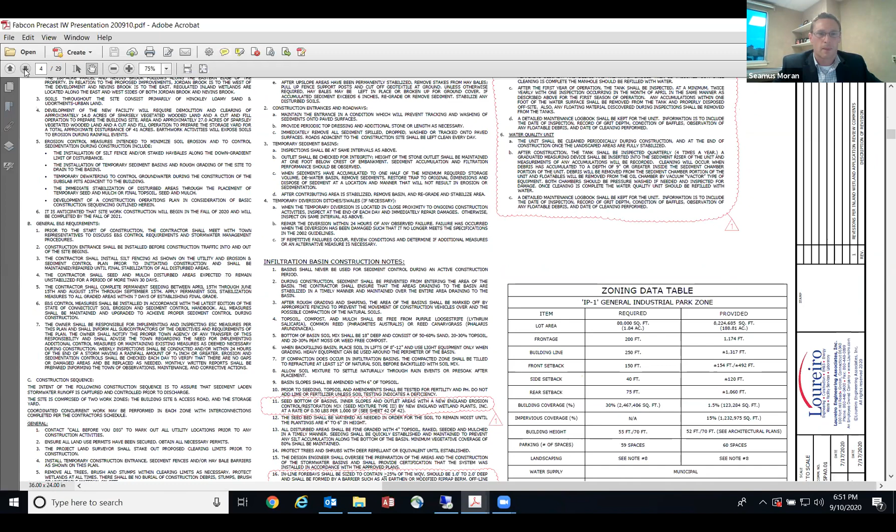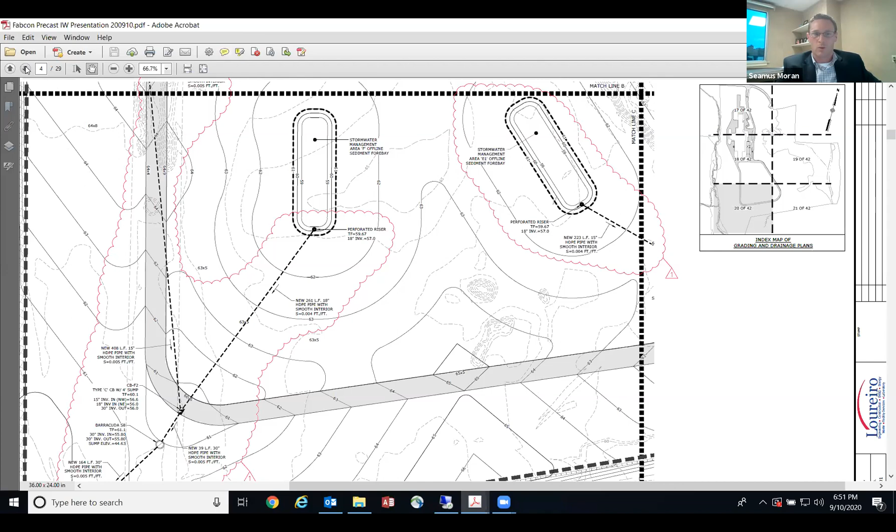Mr. Moran, if I might, excuse me for interrupting - is there any way that as you go through these you can reference the particular item that Maureen has identified? What I can do is, what I ended up doing was provide Maureen's comments with our response at the end of the presentation. If we want to just skip right to that I can, and maybe they overlap at some point. No, I'd just like the commission to be able to identify which of staff's comments have been resolved by the changes you're going to make. Yeah, of course, and I can go over all of that. I certainly want to see your presentation, as I'm sure the entire commission does, but I also want to try to keep tabs on what's been done and what may be left to do.

So how about this - I'll breeze through all the plan revisions we made based on the wetland scientist, and based on the herpetologist. I'll tell you what we did, then we'll get into the comments and go back and search for things. Okay, thank you very much. Of course. So again, oh actually, I was on the right thing.

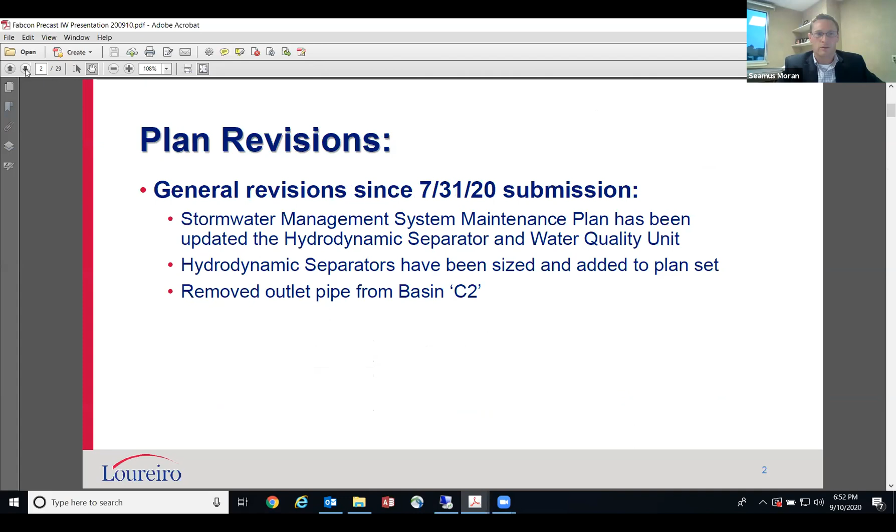Comments from the wetland scientist, Jim Cowen: we revised the plantings in the northeast corner of the storage yard and along basins C2 and C3. We revised the basin seed mixture. We added notes to install milkweed plugs in and around each basin. And we added the approximate location of vernal pool 1 and call-out notes to add woody debris to the slopes of vernal pool 1 to enhance the amphibian habitat.

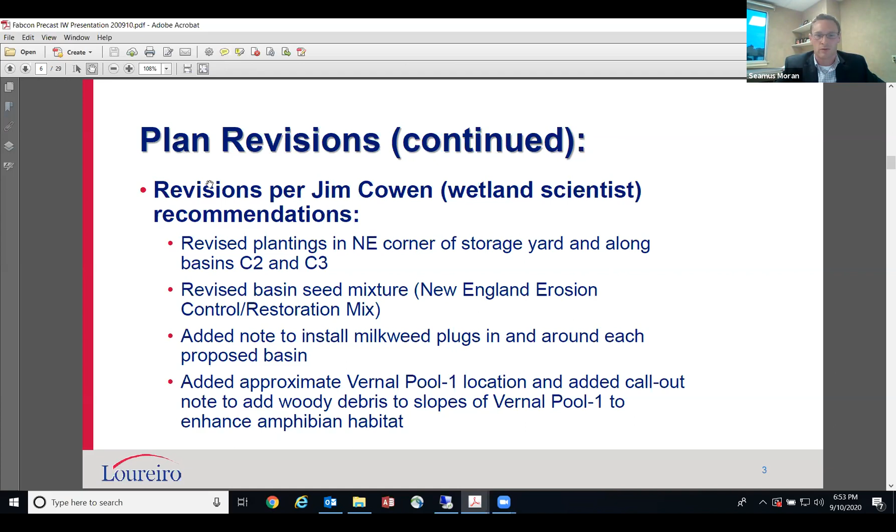For the herpetologist, Dennis Quinn, he asked that we add a wildlife barrier around the perimeter of the site, which we have added. It's a combination chain link fence and concrete barrier - chain link where we don't want to withhold or disturb runoff from getting to where it needs to go, and concrete barriers elsewhere. There was also a conservation easement added around Jordan Brook, 300 feet on the west side and up to 300 feet on the east side - either up to the development or up to 300 feet, whichever is closer. We added that to the plans, and added a note to remove invasive species within the conservation easement. All of those are recommendations by the herpetologist.

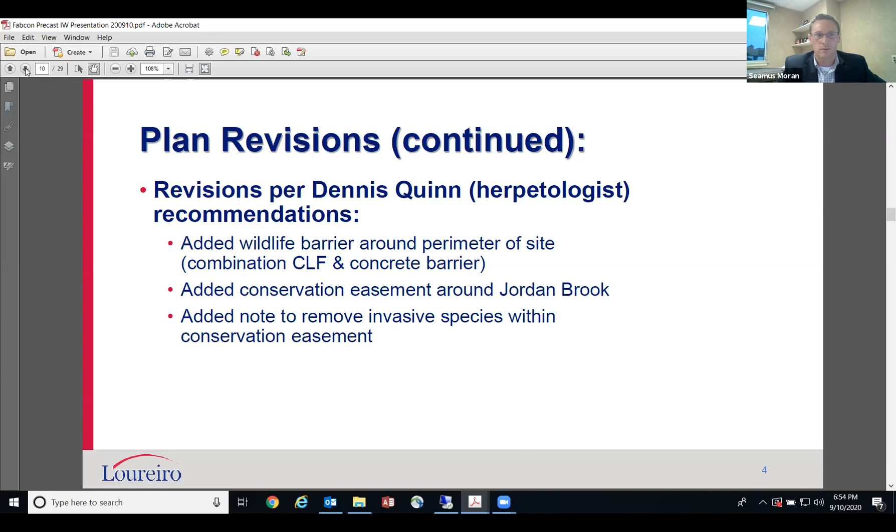Moving on, some of the plan revisions based on Maureen's comments and conversations I had with her: we added a water quality unit per Wade's comments at the first meeting we had with you guys. Wade mentioned the catch basins adjacent to the stockpile areas should have some treatment installed, so we propose a water quality unit now. That unit, based on third-party testing, supports 88% total suspended solid removal and 80% oil and grease removal efficiency. In addition, we added 4-foot sumps to the catch basins in the other material stockpile areas. We also updated the storage yard cross-section based on the geotechnical report, added 2 additional catch basins along the access drive, and removed the outlet control structure for basin A2, which I'll get to momentarily.

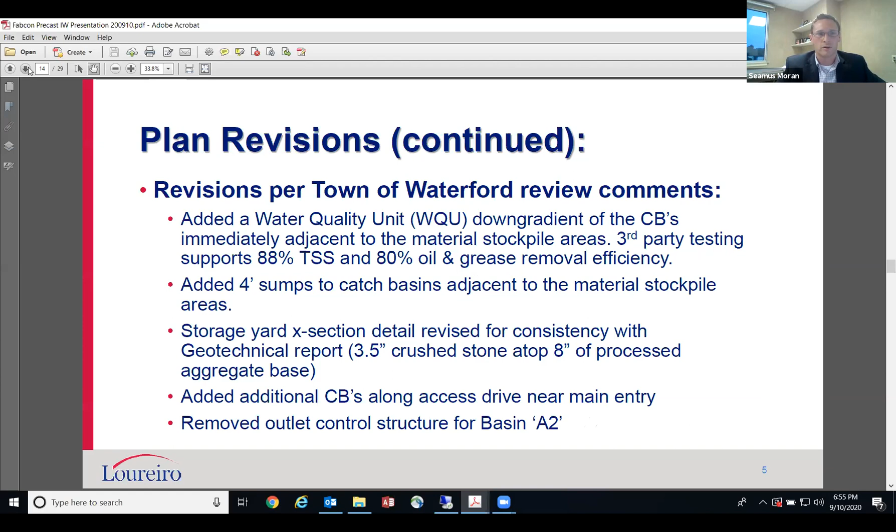So those are the plan revisions that we got to based on Maureen's comments. We couldn't get to all of them yet. In my response to Maureen, I do address how we will be handling them. They did not make it into this plan set, but I wanted to get an idea in front of the commission of how we were planning to handle that, so you guys can see that. So if we move on here, I can go down to Maureen's comments.

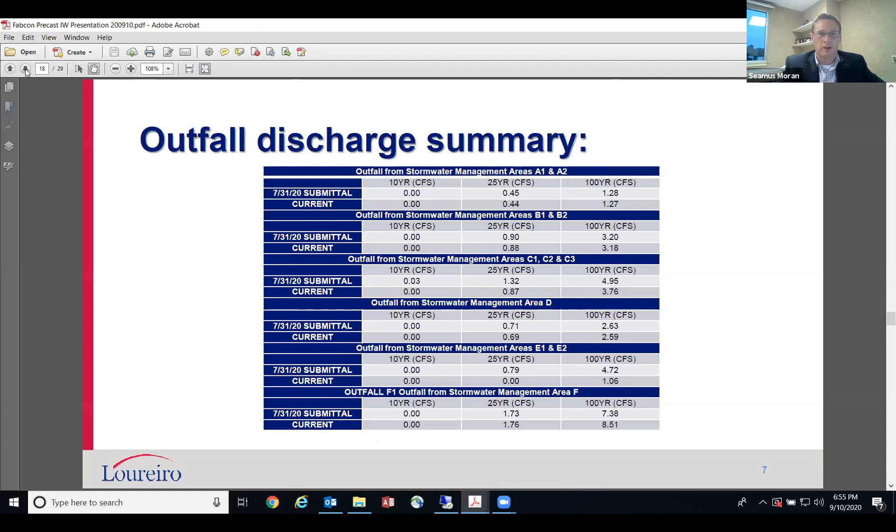There's a support letter from Jim Cowen saying we've incorporated all of his recommendations. He doesn't have any issues. There's also another support letter from Dennis Quinn, the herpetologist, saying similar. And then we get into Maureen's comments, followed by our comments.

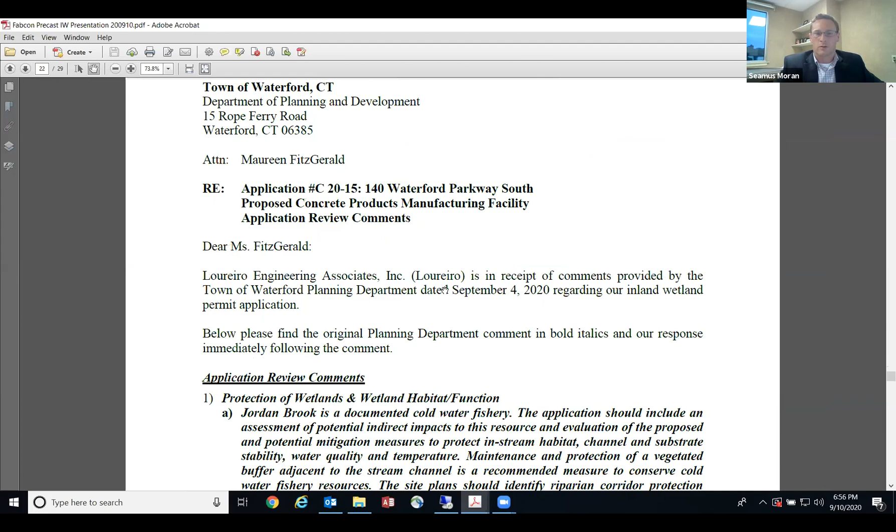So if you see in this response here, Maureen's comments are in bold italicized. So I can read through all those, and I guess I can go through them quickly and explain what we did. It's probably going to take a few minutes if anybody has any questions before we get into them.

Otherwise, I'll just get right into them. So does anybody have any questions? Are there any questions of Mr. Moran at this point? I do. Dave Lersch, if I may.

So I read the report from the herpetologist, and I don't know how long the chain link fence is that they're talking about, but really, how much different, for the commission members, is this site than other sites where we've never required barriers like this for turtles to go onto surfaces? I mean, I'm just wondering, is this more than really is needed? It's a nice thing to do, but is the risk to that many turtles really all that great that you have to require, I don't know how long of a fence to be installed to keep the turtles from getting onto the hard surface and run over?

And also the invasive species, like bittersweet and those sort of things in the wetland area. We've always been very cautious of requiring removal of that, particularly if somebody wasn't going to do it by hand—it's a big task along that area. I don't know how much bittersweet or other invasive species there are, but is that really critical? I appreciate the expertise of the herpetologist. Honestly, I'm not a herpetologist. I don't know, but it isn't consistent with decisions we made in the past.

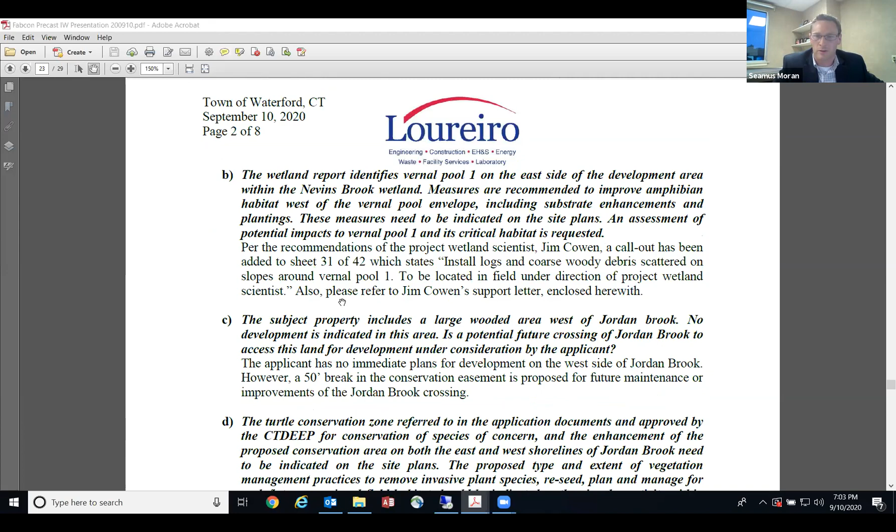Comment 1B: the wetland report identifies vernal pool 1 on the east side of the development area within the Nevins Brook wetland. Measures are recommended to improve amphibian habitat west of the vernal pool envelope, including substrate enhancements and plantings. These measures need to be indicated on the site plans. An assessment of potential impacts to vernal pool 1 and its critical habitat is requested.

Per the recommendations of the project wetland scientist Jim Cowen, a call-out has been added to sheet 31 of 42, which states: install logs and coarse woody debris scattered on slopes around vernal pool 1, to be located in the field under direction of the project wetland scientist. Also please refer to his attached letter.

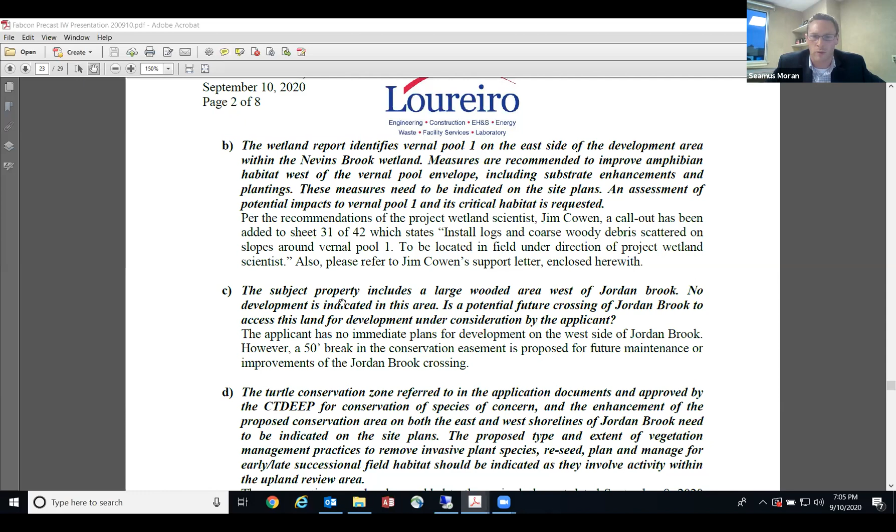1C: the subject property includes a large wooded area west of Jordan Brook. No development is indicated in this area. Is a potential future crossing of Jordan Brook to access this land for development is under consideration by the applicant. Our response is that the applicant has no immediate plans for development on the west side of Jordan Brook; however, a 50-foot break in the conservation easement is proposed for future maintenance or improvements of the Jordan Brook crossing.

Item 1D: the turtle conservation zone referred to in the application documents and approved by Connecticut DEEP for the conservation of species of concern, and the enhancement of the proposed conservation area on both the east and west shorelines of Jordan Brook, need to be indicated on the site plans.

The proposed type and extent of vegetation management practices to remove invasive species, reseed, plan, and manage for early-late successional field habitat should be indicated, as they involve activity within the upland review area.

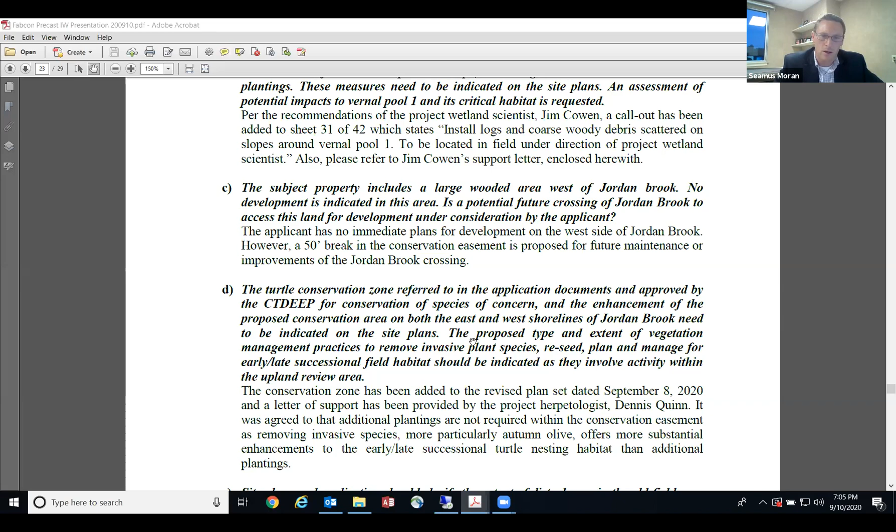The conservation zone has been added to the revised site plan set dated September 8th, 2020, and a letter of support has been provided by the project herpetologist, Dennis Quinn.

It was agreed that additional plantings are not required within the conservation easement, as removing invasive species, particularly autumn olive, offers more substantial enhancement to the early-late successional turtle nesting habitat than additional plantings would.

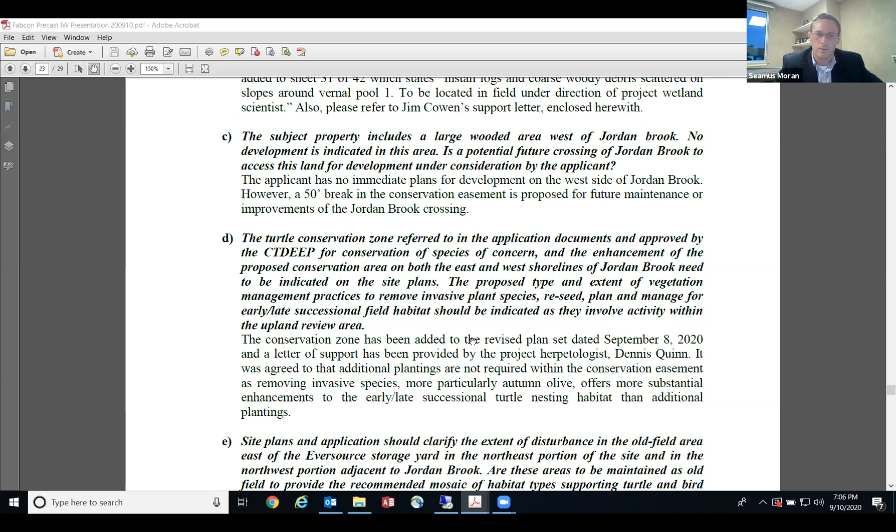Site plans and application should clarify the extent of disturbance in the old field area east of the Eversource storage yard, in the northeast portion of the site, and in the northwest portion adjacent to Jordan Brook. Are these areas to be maintained as old field to provide the recommended mosaic of habitat types supporting turtle and bird species of concern? The geotechnical report and environmental due diligence reports show the northeast area as a storage yard. Please clarify the limit of proposed disturbance in these areas.

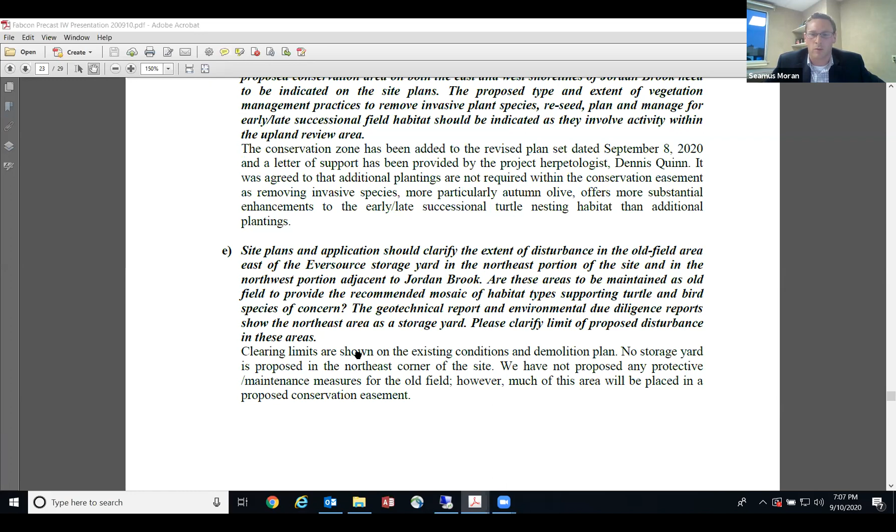Our response: clearing limits are shown in the existing conditions and demolition plan. No storage yard is proposed in the northeast corner of the site. We have not proposed any protective maintenance measures for the old field; however, much of this area will be placed in the proposed conservation easement.

Item number 2 is stormwater treatment and mitigation of indirect impacts.

Item 2A: the location of material stockpile areas, loading bays, and containment measures to prevent fines from entering the stormwater treatment system should be identified. Surface storage areas on paved surfaces should be protected with berms, grading, or other measures to prevent discharge of sediment to catch basins.

Our response, item 1: stormwater improvements proposed within Stormwater Management Area B to prevent fines from entering the stormwater treatment system include the following. Water quality unit: an offline ADS water quality unit is proposed downgradient of the catch basins immediately adjacent to the material stockpile areas. Full-scale laboratory testing of the water quality unit, conducted by Alden Labs in Holden, Massachusetts, showed an average removal rate of 88.3% for total suspended solids and 80% for oil and grease.

The water quality unit has been sized to treat the water quality flow for the runoff from the area draining to the catch basins immediately adjacent to the material stockpile areas. The water quality unit testing report and sizing calculations are enclosed herewith.

B would be catch basins with 4-foot sumps. These 4-foot sumps are proposed in the catch basins adjacent to the material stockpile areas and in the terminus catch basin before infiltration basin B2, inline before the inline sediment forebay.

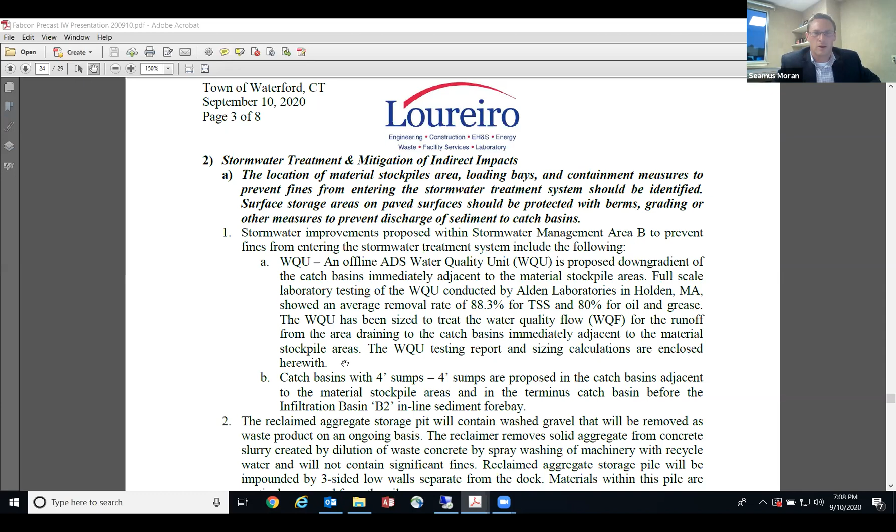Response number 2: the reclaimed aggregate storage pit shown on the plans will contain washed gravel that will be removed as a waste product on an ongoing basis. The reclaimer in the building removes solid aggregate from concrete slurry created by dilution of waste concrete by spray washing of machinery with recycled water, and will not contain significant fines. The reclaimed aggregate storage pile will be impounded by 3-sided low walls, separate from the dock. Materials within this pile are routinely removed. That has not been added to the plan yet, but I wanted to include it as a response.

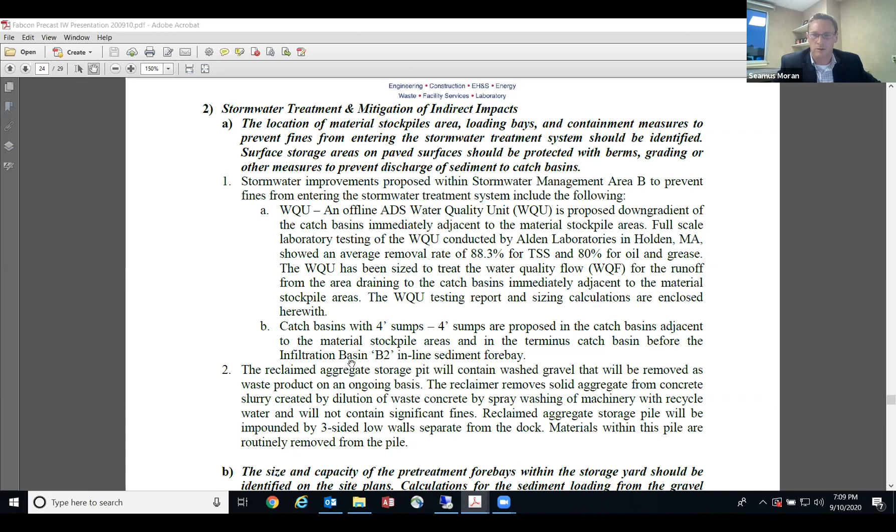2B: the size and capacity of the pretreatment forebays within the storage yard should be identified on the site plans, and calculations for sediment loadings for the gravel storage yards should be developed so these forebays can be sized accordingly.

The size and capacity of the offline forebays will be added to the site plan. They have not been yet. Sediment loadings will also be calculated and will be provided.

The effects of the stored concrete panels on site impervious area does not appear to be considered in the runoff calculations for the storage yard. What effect does the storage of these panels have on pervious area available? What portion of storage yard runoff is designed to infiltrate into the in-situ gravels versus discharge to pretreatment forebays and perimeter stormwater infiltration basins? This is a good comment.

As the yard is filled, panels will be placed. It's not permanent, not like installing concrete sidewalks throughout, but we expect that if fully utilized, about 50% of the usable space would be occupied by concrete panels. So we will have to revise our model to show that we're including those. The curve number we already had was very high, I think an 85 curve number in the HydroCAD model.

By weighting that with the impervious area, the curve number will probably go to about a 91 or 92, which will add runoff. We do have capacity in basins E and F to tinker with it a little to make up for that increase in runoff.

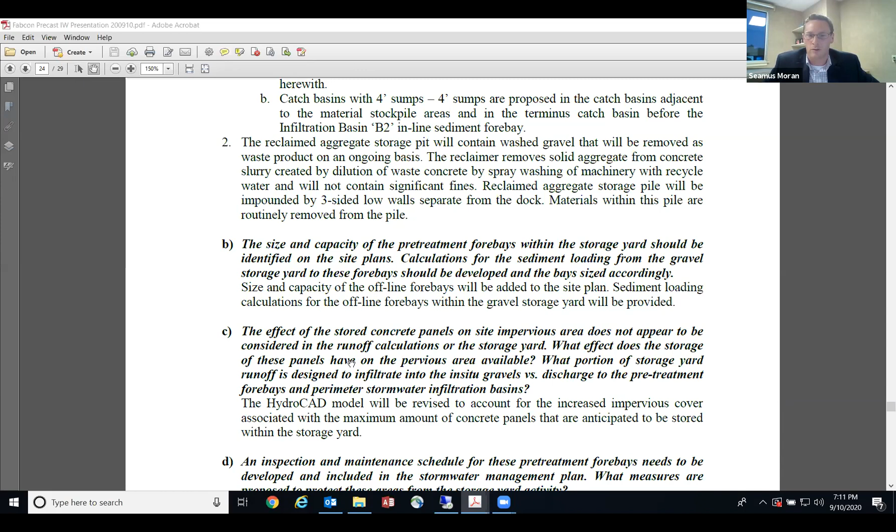So that is a minor thing we will look into, and we will be revising our plans in the HydroCAD model based on that.

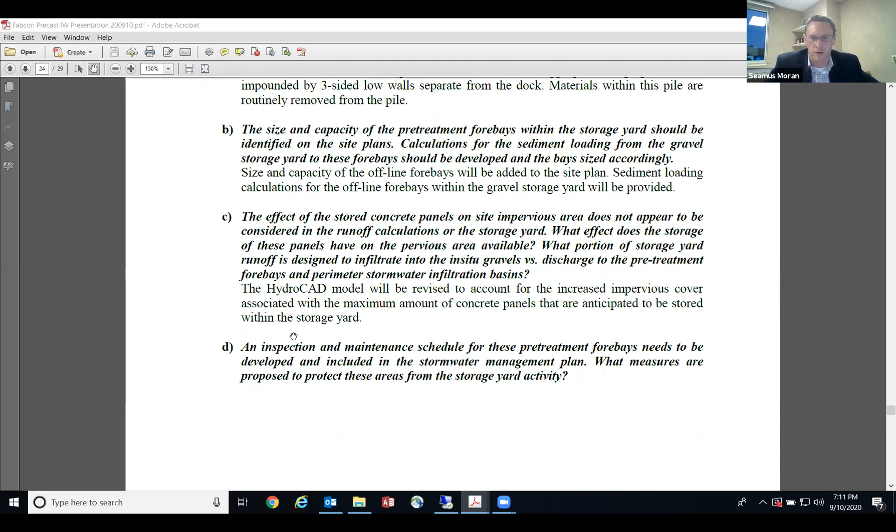2D: an inspection and maintenance schedule for these pretreatment forebays needs to be developed and included in the stormwater management plan. What measures are proposed to protect these areas from storage yard activity?

An inspection and maintenance schedule will be included in the stormwater management plan. A chain link fence will be provided around the offline forebays to prevent vehicle entry or storage of panels. So essentially, we haven't done it yet.

Again, I wanted to get these comments to everybody so we could discuss and present them. We are going to put a fence around these areas so they do not place panels there. It will be a depression in the ground, so they wouldn't want to put them there anyway. But for this area, we will also develop a management plan.

What we're thinking is it's going to be gravel of some sort, probably a riprap that will be replaced annually, possibly maybe every 6 months, we have to see. We'll have to do it probably every 6 months for the first year to see how much sediment results from the runoff, and then modify from there.

2E: the commission has raised concern with the potential for dust and fines from the storage yard operation impacting the stormwater system and adjacent wetlands. The applicant should provide practices, surface treatment, and other control measures proposed to minimize discharge of fines from storage yard operations. Is a crushed stone surface on the gantry paths an alternative treatment? Are evergreen plantings proposed along the fence line to provide a potential filter?

Per the geotechnical engineering evaluation dated June 22nd, prepared by Haley and Aldrich, the gravel storage yard cross-section will consist of a 3.5-inch layer of washed crushed stone, atop 8 inches of processed aggregate base. That'll be throughout. Haley and Aldrich considered the gantry cranes and the storage of panels, and that was their recommendation, so we carried that over to our site plans.

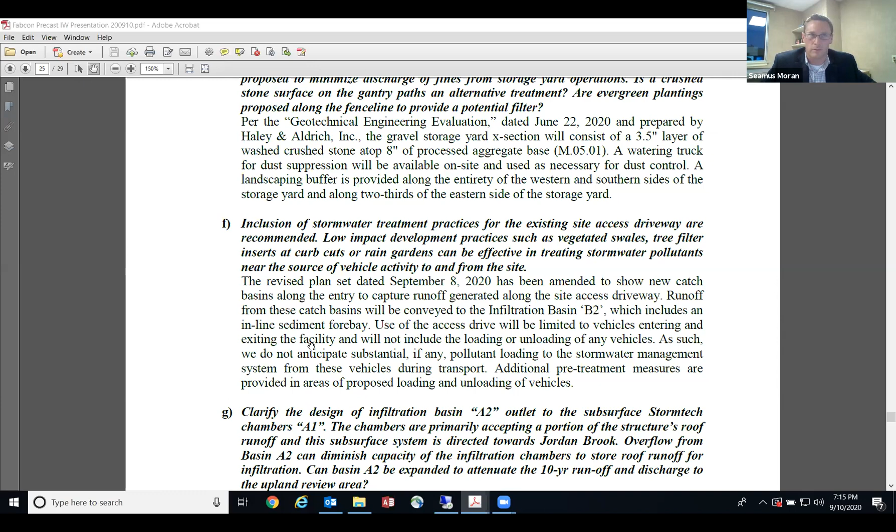2G: clarify the design of infiltration basin A2 outlet, and clarify the design of infiltration basin A2 outlet to the subsurface Stormtech chambers A1.

The chambers are primarily accepting a portion of the structure's roof and runoff, and this subsurface system is directed toward Jordan Brook. Overflow from basin A2 can diminish capacity of the infiltration chambers to store roof runoff for infiltration.

Can basin A2 be expanded to attenuate the 10-year runoff and discharge to the upland review area? Our response is that basin A2 is actually designed with enough storage to infiltrate the runoff from the 100-year storm event, and there is no discharge through the basin A2 outlet at the 100-year storm event. Therefore, the basin A2 outlet control structure has been eliminated from the design. Basin A2 will have a riprap emergency spillway above the 100-year water surface elevation. The revised site plan set dated September 8th, 2020 has been amended to reflect these changes.

Simply put, Maureen's comment is that she didn't want us to discharge our outlet structure into the storm tech units, which is correct—that wouldn't be a very good practice. But what that was, was just an overflow at the 100-year event. We're infiltrating the very minor area up there; we're infiltrating everything. That outlet structure was an emergency spillway, and we also had a redundant emergency spillway on top of that in case it got blocked for whatever reason. So we've eliminated the outlet control structure altogether, and now just the emergency spillway is set above the 100-year flood elevation.

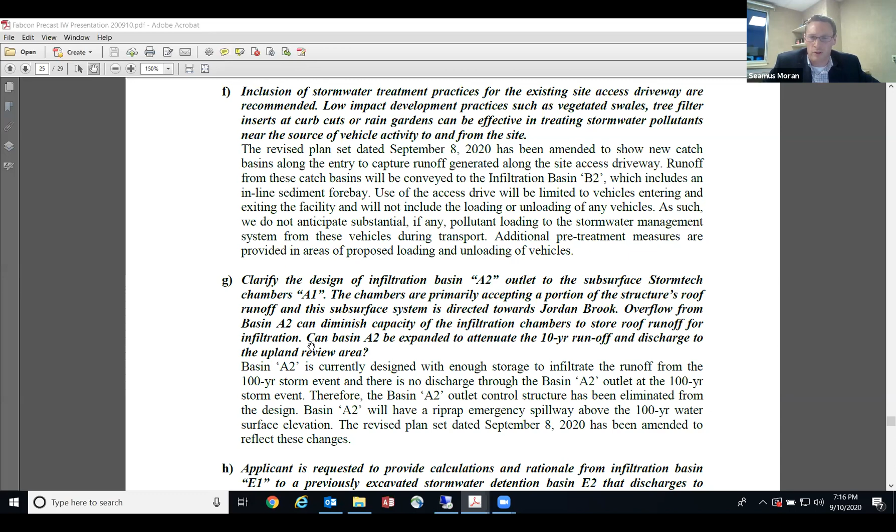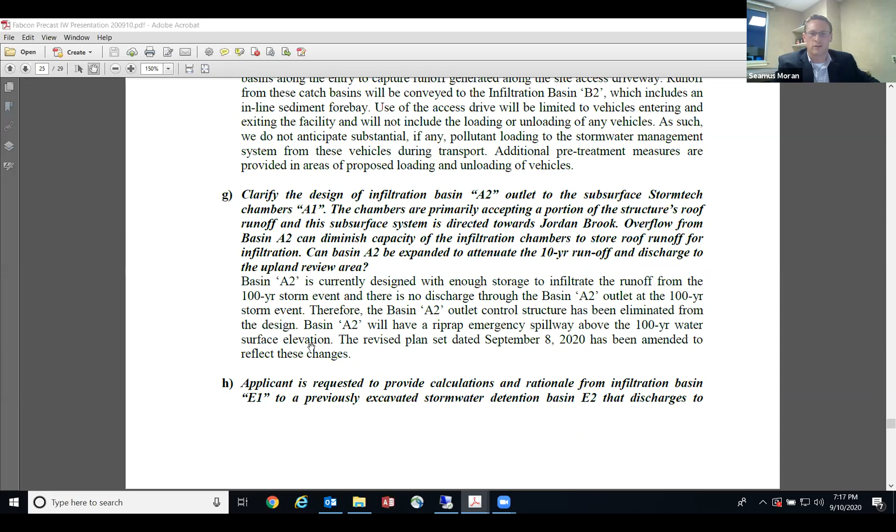So, 2H: the applicant is requested to provide calculations and rationale from infiltration basin E1 to a previously excavated stormwater detention basin E2 that discharges to Nevins Brook. The disturbance to the riparian area bordering Nevins Brook, a wetland of very high quality, should be minimized. Alternative discharge locations closer to basin E1 are available to dissipate the flows and avoid discharge to the Nevins Brook channel.

Basin E2 was excavated 30 years ago. The 15-inch RCP outlet pipe, as shown on the site plans, is not present in this basin. If basin E2 is required to attenuate flow or pollutant loadings, more specific details of the current basin configuration, elevations, and proposed improvements to the outlet are required on the site plans.

Our response is that all flow attenuation and water quality treatment is being accomplished in the proposed infiltration basin E1 and the preceding pretreatment practices. The previously excavated detention basin E2 is currently in good condition, is well vegetated, has no evidence of standing water, and has a graded vegetated spillway located outside the 100-foot upland review area. Due to these factors, it was determined that discharging to basin E2 would be more favorable than creating a point discharge location to the north of basin E1 that would result in disturbance within the 100-foot upland review area.

As proposed, basin E1 only discharges to basin E2 for storms exceeding the 10-year storm event. Basin E2 shows no discharge from the graded spillway for the 25-year storm event, and minimal discharge—1.06 CFS—for the 100-year storm event. For these reasons, we feel that discharging to the existing basin E2 is favorable to a separate discharge location within the 100-foot upland review area. The 15-inch RCP outlet pipe that was depicted on the site plans has been removed.

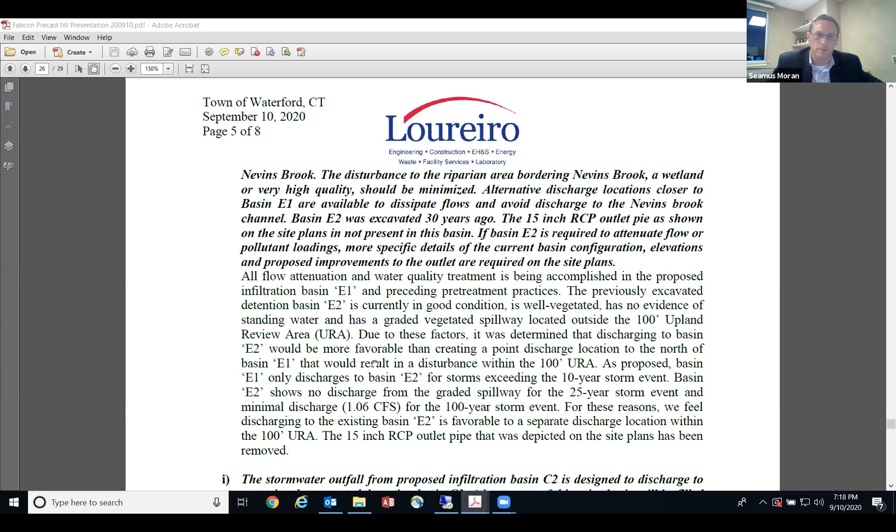Moving on to I: the stormwater outfall from proposed infiltration basin C2 is designed to discharge to a previously excavated detention basin C3. A large area of this prior basin will be filled as part of the proposed site construction. The proposed outlet discharges to a remaining portion of the old basin, then through a permeable berm section, through an existing piped outlet. This outlet directly discharges to wetlands.

The applicant is requested to identify the role of the remaining basin C3 in the attenuation of stormwater flows and any maintenance or corrective actions recommended to ensure the outlet and permeable berm are functional. From historical documents, these prior basins were sized for a 25-year storm event.

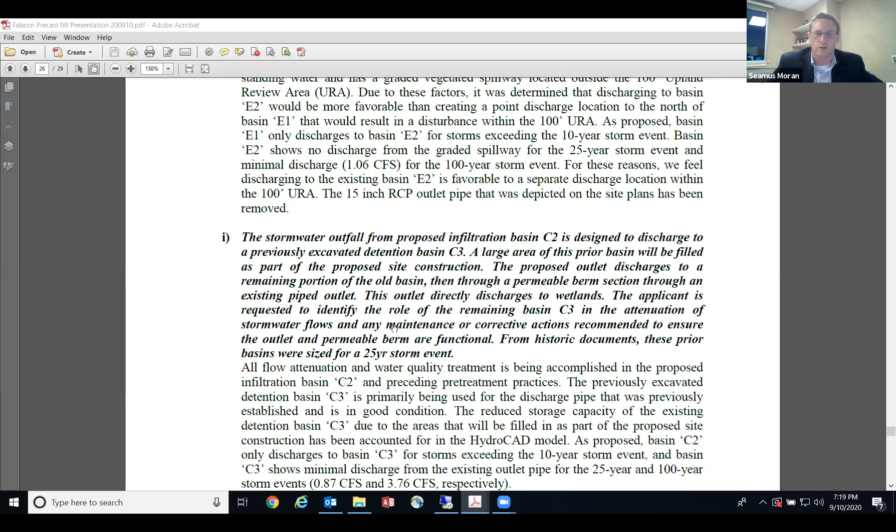Our response is that all flow attenuation and water quality treatment is being accomplished in the proposed infiltration basin C2 and the preceding pretreatment practices. The previously excavated detention basin C3 is primarily being used for the discharge pipe that was previously established and is in good condition. The reduced storage capacity of the existing detention basin C3, due to the areas that will be filled as part of the proposed site construction, has been accounted for in the HydroCAD model.

As proposed, basin C2 only discharges to basin C3 for storms exceeding the 10-year storm event, and basin C3 shows minimal discharge from the existing outlet pipe for the 25-year and 100-year storm events. For the 25-year storm, there's 0.87 CFS discharge, and for the 100-year storm, it's 3.76 CFS.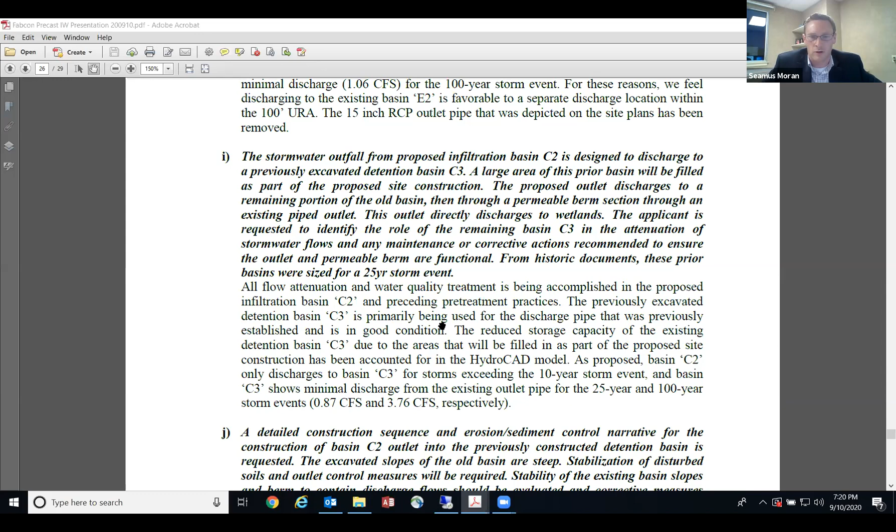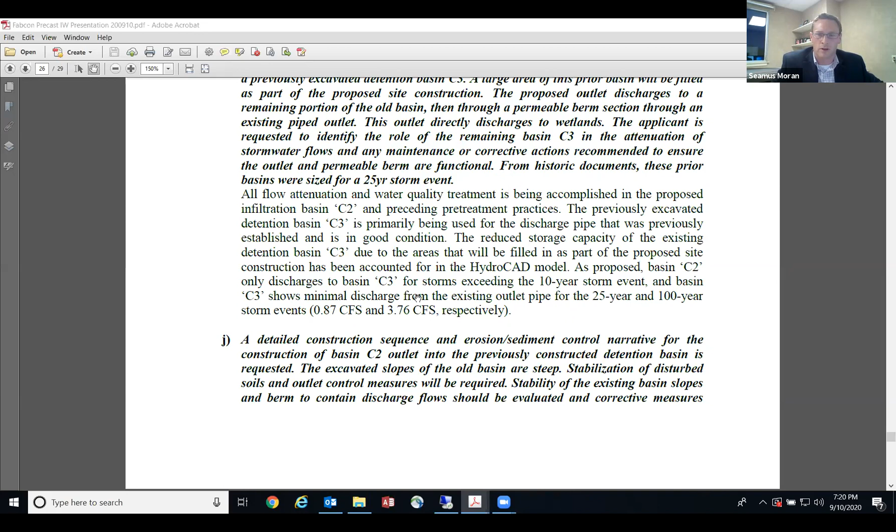Item 2J is a detailed construction sequence and erosion sediment control narrative for the construction of basin C2 outlet into the previously constructed detention basin. The excavated slopes of the old basin are steep. Stabilization of disturbed soils and outlet control measures will be required. Stability of the existing basin slopes and berm to contain discharge flows should be evaluated and corrective measures implemented where needed. Clearing around the existing outlet will be necessary to provide access for proposed monitoring and inspection of this discharge location.

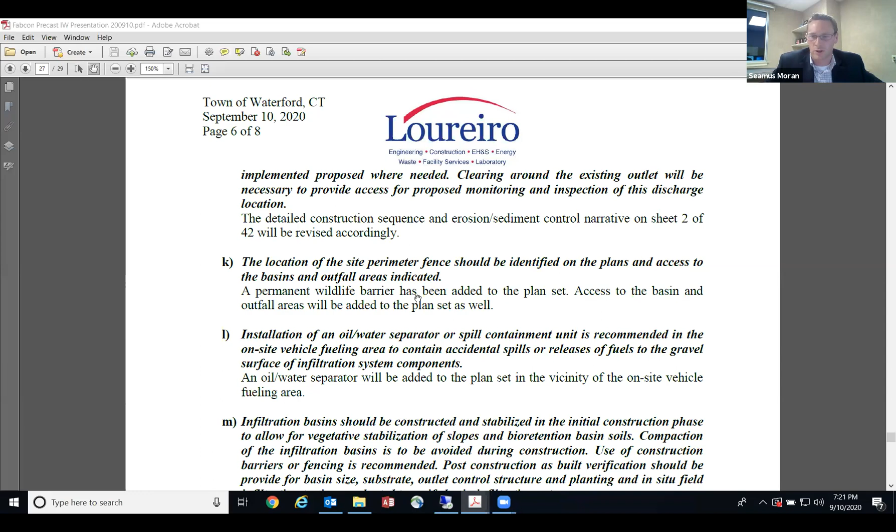So the detailed construction sequence and narrative on sheet 2 will be revised accordingly. We have not addressed that yet, but that will be addressed. A couple of these other items we have not addressed yet, which we will.

2K is the location of the site perimeter fence, which should be identified on the plans, with access to the basins and outfall areas indicated. A permanent wildlife barrier has been added to the plan set, which I discussed earlier. Access to the basins and outfall areas will be added to the plan set as well.

2L is installation of an oil water separator or spill containment unit, recommended in the on-site vehicle fueling area to contain accidental spills or releases of fuels to the gravel surface of infiltration system components. Our response is that an oil water separator will be added to the plan set in the vicinity of this on-site vehicle fueling area.

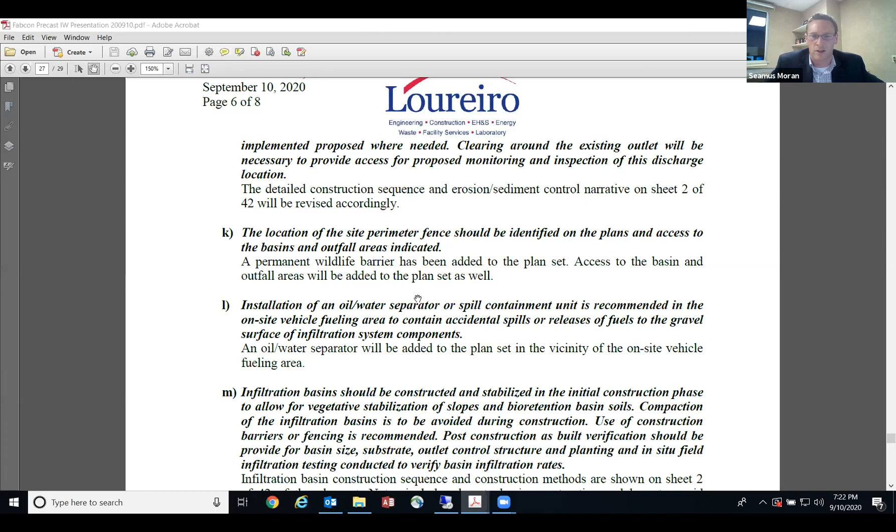2M, infiltration basins should be constructed and stabilized in the initial construction phase to allow for vegetative stabilization of slopes and bioretention basin soils. Compaction of the infiltration basins is to be avoided during construction, and use of construction barriers or fencing is recommended. Post-construction as-built verification should be provided for basin size, substrate, outlet control structure, and planting, with in situ field infiltration testing conducted to verify basin infiltration rates.

Our response is that infiltration basin construction sequence and construction methods are shown on sheet 2 of 42 of the plan set. These notes include when to begin construction and how to avoid compaction of the basins. An as-built plan and drainage certification will be provided upon the completion of construction.

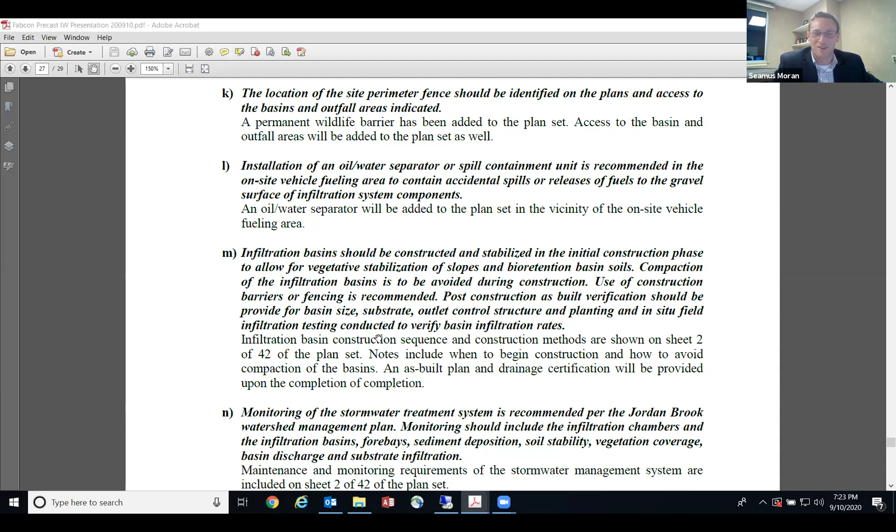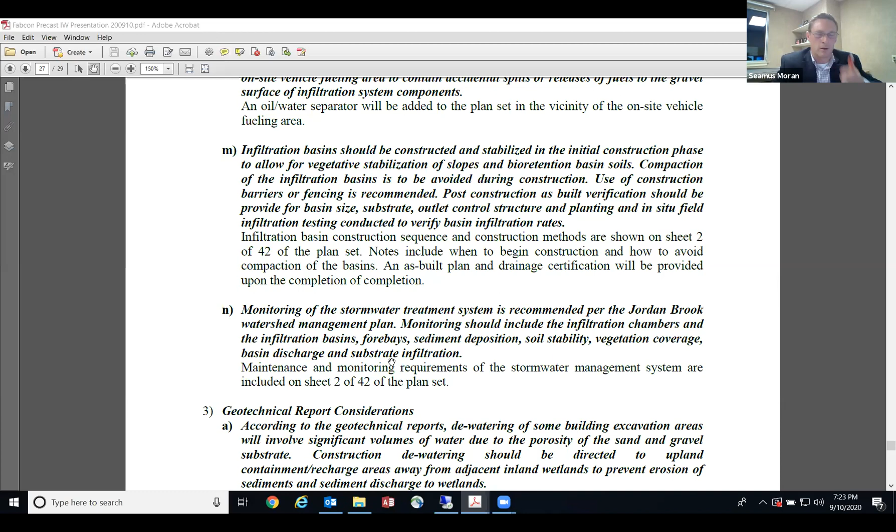2N is monitoring of the stormwater treatment system, recommended per the Jordan Brook Watershed Management Plan. Monitoring should include the infiltration chambers and infiltration basins, forebays, sediment deposition, soil stability, vegetation coverage, basin discharge, and substrate infiltration. The maintenance and monitoring requirements of the stormwater management system are already included on sheet 2 of 42 of the plan set, and all of those items are included there.

Item 3 is geotechnical report considerations. 3A, according to the geotechnical reports, dewatering of some building excavation areas will involve significant volumes of water due to the porosity of the sand and gravel substrate. Construction dewatering should be directed to upland containment or recharge areas away from adjacent inland wetlands to prevent erosion of sediment and sediment discharges to the wetland.

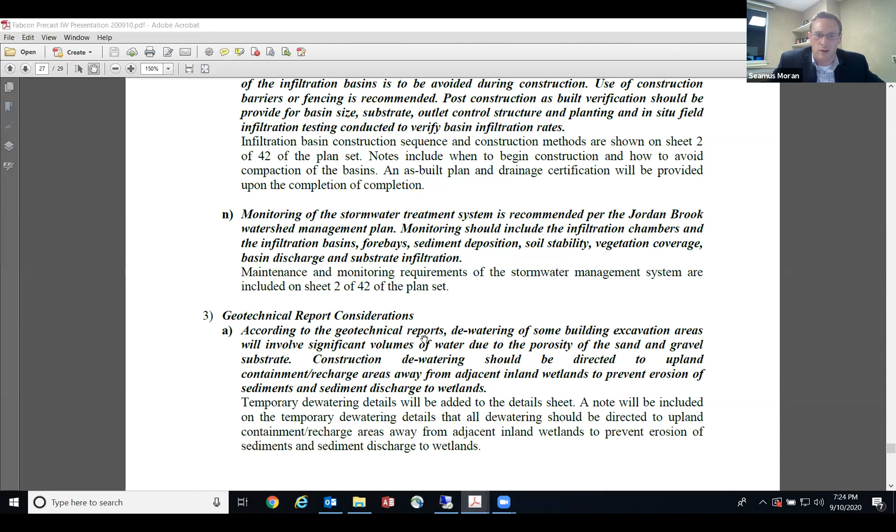Our response is that temporary dewatering details will be added to the detail sheet. A note will be included on the temporary dewatering details stating that all dewatering should be directed to upland containment recharge areas away from adjacent inland wetlands to prevent erosion, sediment, and sediment discharge to wetlands.

3B, according to the Haley and Aldrich March 2020 environmental due diligence report, the location of infiltration chamber D1 is in proximity of the former fuel storage drum and waste oil spill locations associated with the prior airport facility. These areas were reported to be remediated by prior owners or parties. Soils in this infiltration area should be evaluated by an LEP during construction, and any residual impacted soil removed and disposed of accordingly.

Groundwater monitoring in these prior release areas is recommended in the due diligence report. Is this being conducted? Our response is to refer to the environmental laboratory testing program section of the Haley and Aldrich preliminary geotech report dated April 2020. Within this section, Haley and Aldrich states laboratory chemical testing was undertaken on groundwater and select soil samples retrieved from recent subsurface explorations in support of our preliminary environmental evaluation.

Observation well B6OW was placed in the vicinity of area of concern 1.3, the former drum storage area and waste oil spill. Per the environmental testing results section of the preliminary geotech report, samples of groundwater obtained from the observation wells in the building area contain low levels, i.e. below GA pollutant mobility criteria, of VOCs and ETPH, which are likely associated with historical operations at the airport, i.e. storage and use of aviation fuels. As a result, no further action is necessary. Also, please refer to the construction observation section of Haley and Aldrich's final geotech report dated June 22nd, 2020.

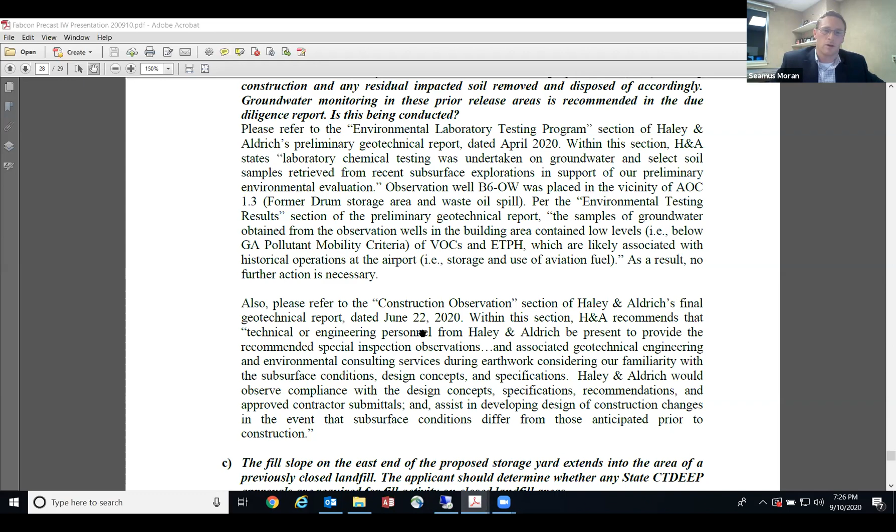Item 3C: the fill slope on the east end of the proposed storage yard extends into the area of a previously closed landfill. The applicant should determine whether any Connecticut DEEP approvals are required for fill activity on closed landfill areas. The response is that an authorization application for disruption of a solid waste disposal area must be submitted to the Connecticut DEEP.

When I spoke to another member of our company, George Andrews, he said that if you're filling, this really shouldn't be an issue. It's just a formality. You have to fill out a form that has to be completed and accepted by the DEP, and he doesn't see any issues with that form being submitted.

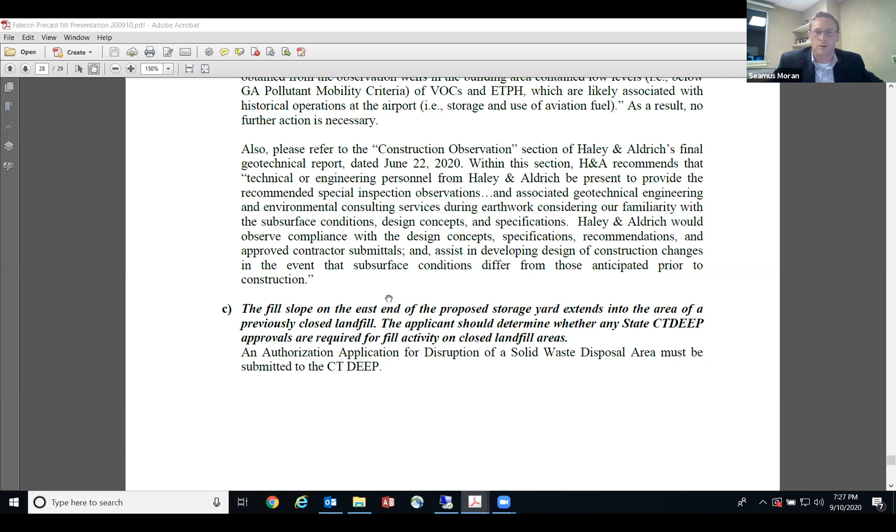So with that, I'm sorry that took forever. Those are Maureen's comments and our responses, whether we've already addressed them in the plans or how we plan to address them. If anybody has any questions, I'd be happy to take them. I'm going to take a quick sip of water, so please fire away when ready.

Thank you, Mr. Moran. Do any of the commissioners have any questions based on the comments and presentation of Mr. Moran's presentation? I do, Mr. Chair.

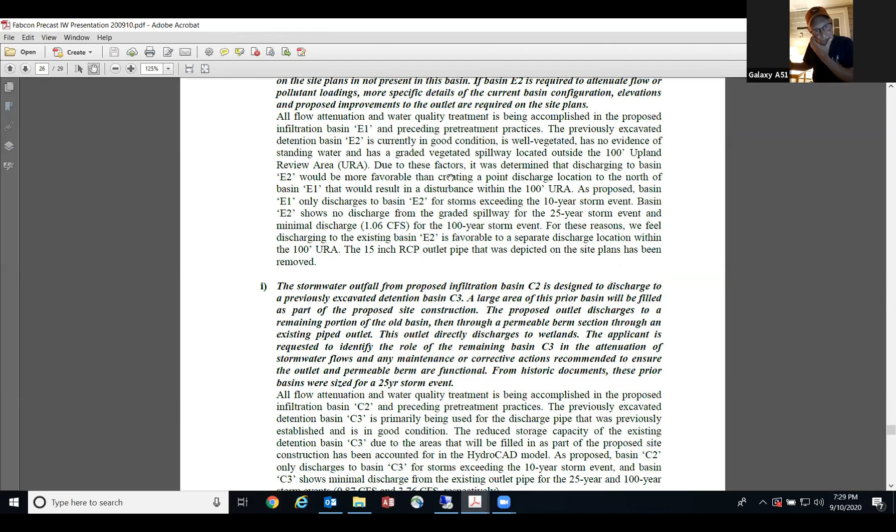Mr. Larish: Yeah, Mr. Moran, thank you for that very detailed description of each of these different items. I greatly appreciate all the work that you've gone through to look at our comments and staff comments. The only question I have is for some of those you mentioned you haven't addressed yet, like for instance number 2J. Do you foresee any difficulty addressing the ones you haven't gotten to yet, or do you see any challenges in addressing these comments as you go forward?

I don't. The only one that will take a little bit of work is accounting for the impervious panels, which we hadn't accounted for. We accounted for a very high curve number based on the gravel subbase, but Maureen's point is well taken. If the panels are face up and occupying 40 or 50% of the storage yard, that has the potential to generate more runoff, so we have to account for that in the HydroCAD model, which hasn't been done yet. That's a simple change but will take a little work. All the other ones are pretty straightforward.

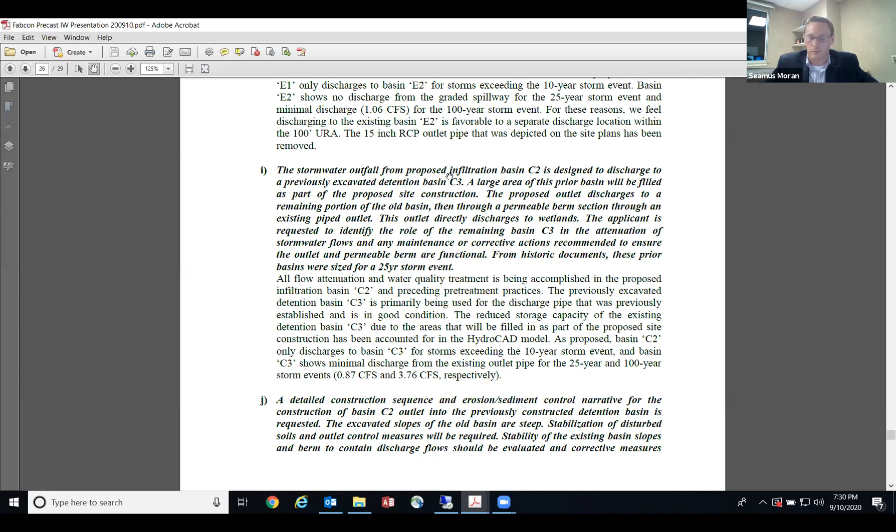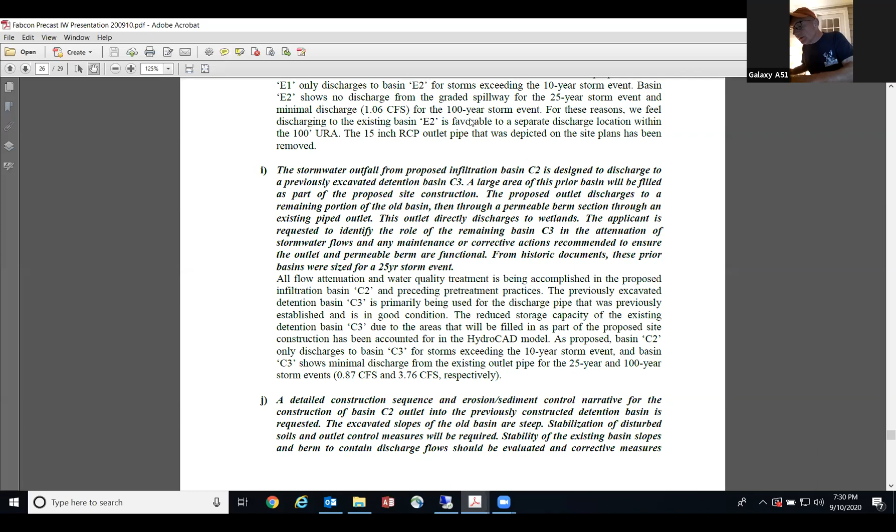Great, thank you. The only other comment I'd make to the rest of the commission is this, regarding the last comment we talked about, number 3, 3C: DEP, from my experience with them lately, is extremely slow because of COVID in getting replies back, and that's an issue with something that's commonsensical and not really critical, that shouldn't hold up production based on some of these DEP approvals. I don't know what way to go around them—not really go around them, but once we're outside of here dealing with another agency, I'm sure, Seamus, you've had some difficulty getting to the right people at DEP.

For this one issue in particular, is it really that important that you get their answer in writing before going forward? Do you see challenges? Basically the question is, do you see challenges in getting any other DEP approvals or DEP comments?

For this one in particular that you're referencing, 3C, when I spoke to George Andrews from our company, he said this is literally a formality. They'll sign off on it. This will be the quickest DEP approval you'll get because everything else takes forever. He said this one should go pretty quickly. Obviously we have to get several other permits, which may take more time, but we're in the process of those as well.

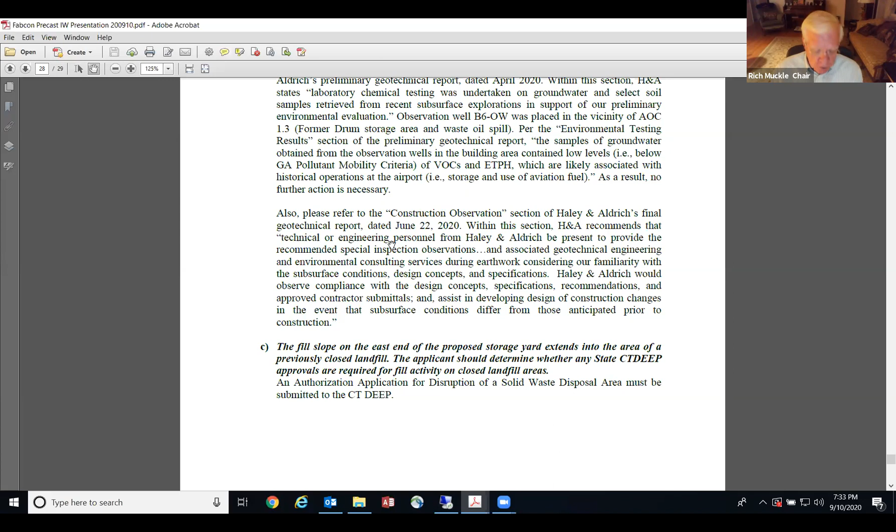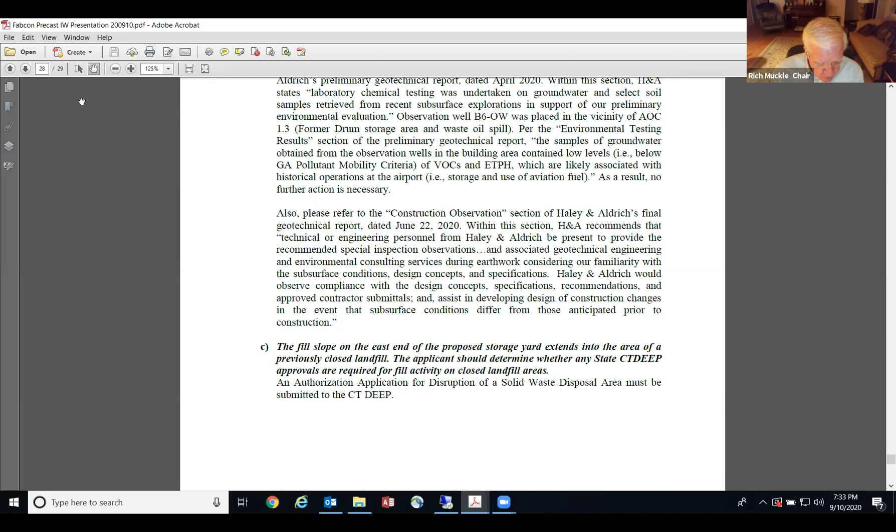Mr. Moran, I have a question, and I think you answered it, but I just want to be sure I understood your answer. If I'm not correct, please correct me. The storage area, last meeting, was addressed as a concern for the travel of the gantries. I think in your response to Maureen's comment, you stated that area is now planned to be covered with 3 inches of crushed stone. Is that correct?

That's correct. By asking the question, you forced us to actually look at our own documents, which we thank you for. Haley Aldrich did recommend a cross section in there. They recommend 3.5 inches of crushed stone on top of a processed aggregate, and the goal is obviously to do that everywhere. It's probably going to be in steps. They're probably not going to be doing the entire storage yard immediately. They will be grading it, but they'll probably be coating it with crushed stone as the need develops, as panels are produced. I believe they don't envision filling the storage yard in the first couple months, so I'm sure Jeff can correct me if I'm wrong, but I do believe there'll be a stepped process of filling in the storage yard.

Yes, I think we would like to stage the surface improvements as the yard is required. We'd make all the grading changes so the drainage could be handled properly, but then make the surface improvements with crushed stone and gravel on an as-needed basis as the yard gets populated with panels.

I guess I would defer to staff for your opinion, Maureen, on that process. That's about how much opinion I have. I'm glad it was clarified that there will be some kind of stone surface over this sand and gravel substrate, and we can certainly make that a condition when the commission goes forward, to have that done in stages and required on plans and submittals.

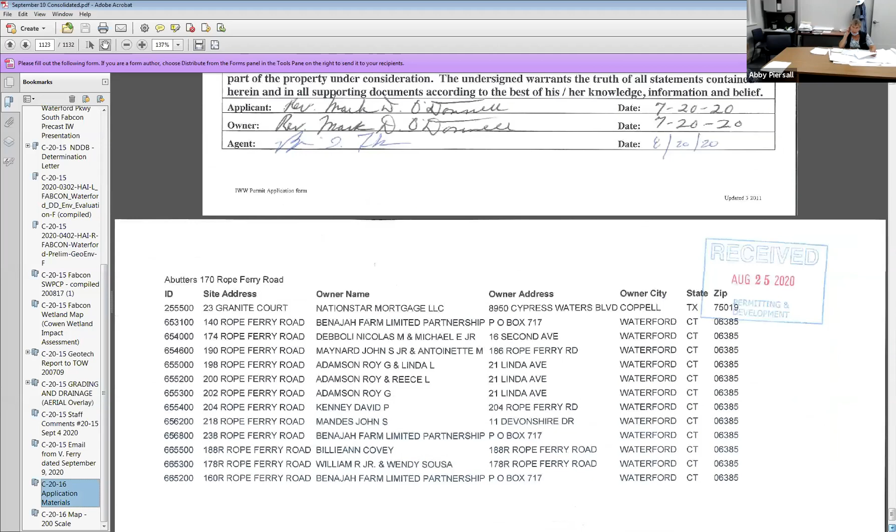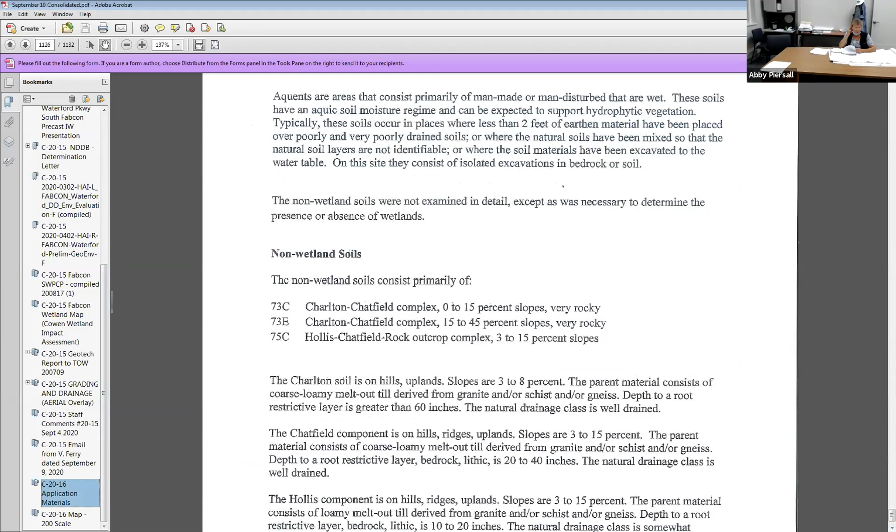In the Jim Cowen report, he investigated all these small pockets through January, March, and April for the presence of amphibian breeding in their vernal pools. Three of them, farther to the east of the proposed development site, were found to contain egg masses of spotted salamander.

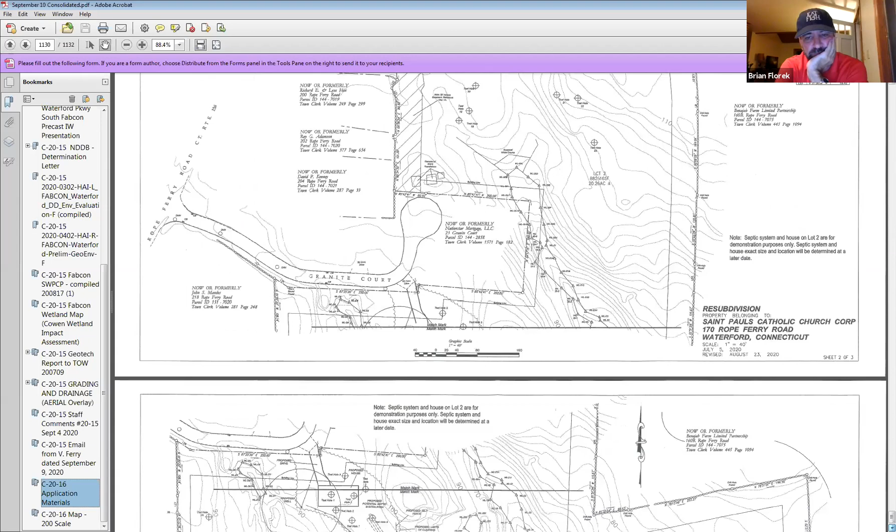But the ones in closest proximity to... hang on, we're going to get up and get the map up. Go to the next one. Next one. This one. Right here. Okay. Next one. One more. Yeah, here we go. Thanks, Brian. And I'm going to give it to you.

So I can't point them out to you, but the three small pockets that are to the west of the house location and the clearing limits.

Is everybody there? Yeah, I don't know if we have the mouse. We're at someone else's desk. Oh, hey, all right, I got it. Give me a second because the mouse is not obeying. Katrina, you do it because I'm going to break it. Excuse me, Maureen. Ivy, will you sit for Rich Muckle? Oh, there you go. I don't know if she's still with us. Yeah, she is. Give her a shout out again, Tom. Ivy, will you sit for Rich Muckle? You're on mute. Oh yeah. Yes. Okay, thank you. Continue, Maureen, sorry.

No, my mistake. So can you see the little hand? This small pocket, and this small pocket, actually this is a very deep small pocket. This is all bedrock exposure from the quarrying operation. No egg masses were found in those, so those are just small isolated wetlands. The clearing limits as proposed are greater than 50 feet from any of those. The vernal pools were found, the amphibians were found here and here. And this is an intermittent stream that comes down through here.